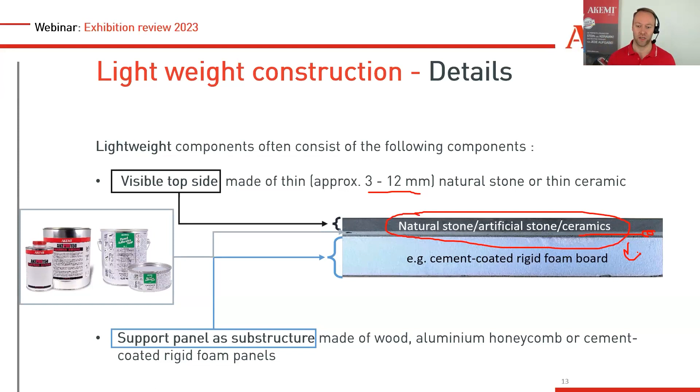Then you have the advantage you save money on the expensive material, which is usually the natural stone. Don't use a 2 or 3 centimeter natural stone. You can save money there when you use a thinner board for the installations. So this is lightweight construction. We have two adhesives for that. As I said, we have our AKEPUR 150, our elastic polyurethane glue, and we have our AKEPUR 7030.

These lightweight constructions usually are built in standard size formats. These boards are usually very straight, flat, 1 meter by 2 meters, etc. So you can cut them and glue them, not to your substrate, to your ceramic or natural stone. But when you want to create a lightweight element which is not flat and straight and square, where there are some inclines, some hidden spots where you cannot put a board, where you have a more complex construction.

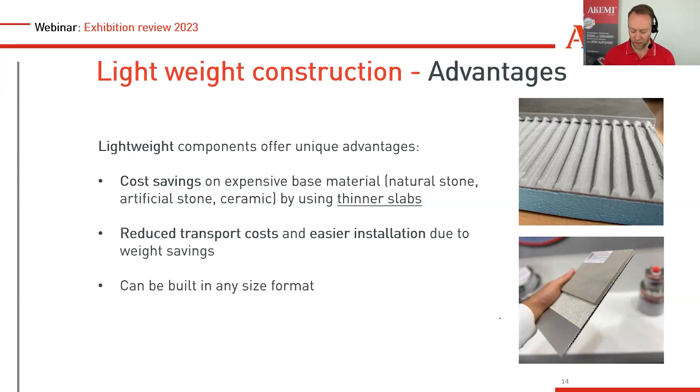So, for example, a shower tray, a customized shower tray with different inclines. Maybe you don't see it here. You have the incline to the drain from here and here. I will show you the back side of this object already. Here maybe you can see it better. So here you have the incline. In this case, it's a ceramic.

It's bonded together with our Everclear, but you have the incline. Here you have the drain, so the water can go out. So how to install that? That is quite difficult. Here you cannot use a standardized foam board or aluminum honeycomb or plywood to glue to it because you always have the incline.

To reinforce it. Of course, you can put it directly in mortar, but then you have to level all the heights with mortar. And you have to be sure that there's no hollow spot which you miss, because it's a 6 mm ceramic. When you step on it and there's a hollow spot, it can break.

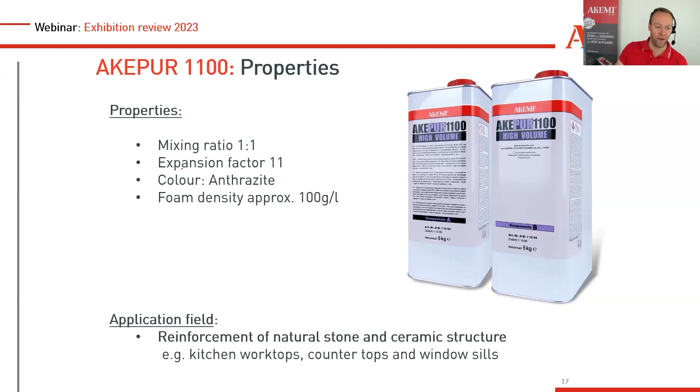So what can we do when your customer asks for such objects? We have a product now called AKEPUR 1100. This is a two-component polyurethane product. And why is it called 1100? Because it has an expansion factor of 11. What does that mean? That means that you have 1 liter of product which will foam up. It will create a foam which will later be 11 liters.

So out of a small amount of liquid, you can get a big amount of foam, which glues and sticks to your stone, to your ceramic, etc., and goes in all the hidden spots and all the inclines and reinforces that. So what is the application field? As I said, shower trays like that, but also kitchen worktops, countertops, window sills. When you want to do some lightweight construction with a massive look, but you have some difficulties to do that with boards.

These are the properties of the product. You mix it 30 seconds. It's quite a fast product. The foaming process starts after 2 minutes. So you pour it in, it starts to foam, the end of foaming is about 7 to 10 minutes, and after 25 minutes, it's hard. And you can cut the excess, for example.

And then you can create objects like that. Ceramic and foam, which is bonded together, very lightweight, very solid. You don't need any extra glue. It's one solid piece of lightweight stone or ceramic.

Are there any questions already, Otello, or do we move to our demonstration? Hello, everyone. Yes, there is a question, but I think we can move to the table and then you can answer them. Okay, let's move.

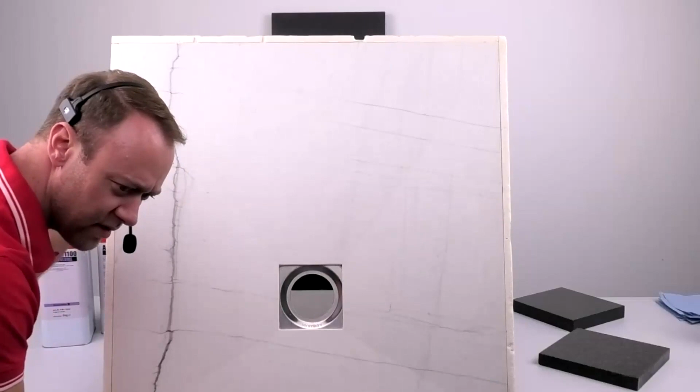Otello, is it visible? Move it a bit more to the camera. More to the camera. Stop. Yes, now it's visible.

Okay, perfect. So you can see here, here, and here the incline. This is a custom-made shower tray. The customer wants a shower like that. He needs an incline. The ceramic should be installed like that. It is very difficult to install that in a mortar bed to get the incline right, to get no hollowness. So what can you do? As I explained, you can use our AKEPUR 1100 foam.

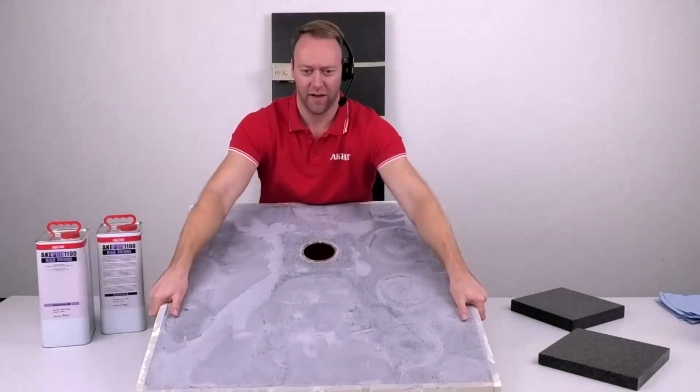You pour it on the backside. It will foam up and create one very lightweight construction board. You can see here, this is the foam, a flat surface now. This is now easy to install, but you have the incline, you have a solid construction. When I knock on it, it's really rigid, it is strong, you can walk on it, and it has a very high compressive strength. It's very strong, rigid, no hollowness, no holes where you step on it. This is this application.

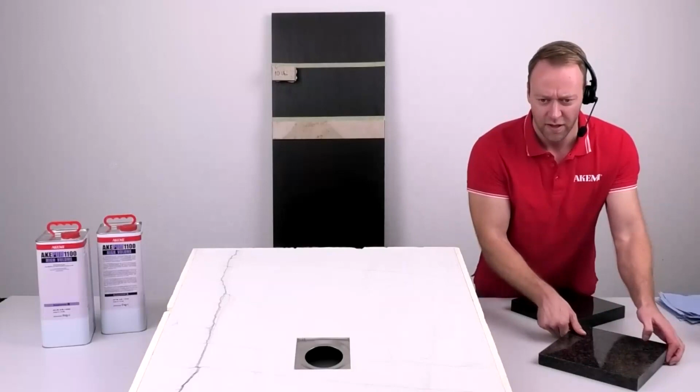On the other hand, I talked about window sills, for example. You have a typical window sill. You see here, 3 centimeters. Very strong, very heavy. I have to lift it with two hands. And on the other hand, you have the same size, but I can lift it with 2 fingers. It looks like a massive block.

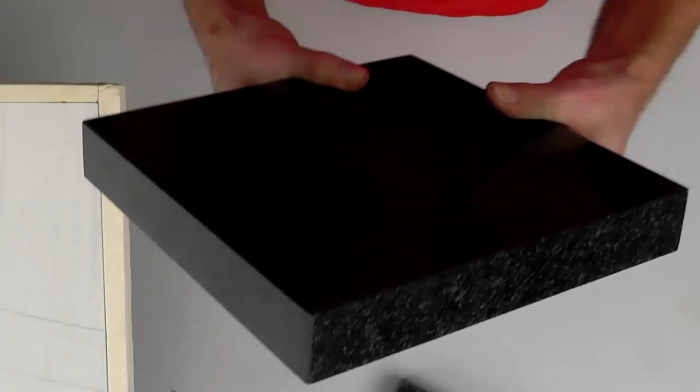You can see it here. It looks like a massive block. It is very strong. It is rigid. There is no hollowness, but when you turn it around, you can see there is foam, which glued to both parts of the stone and formed a very strong, rigid object, which you can put some force on, but it is very light. So this is one application.

Two different filling methods. In this case, you have this frame. I think you can see it. Then you turn it around and you fill it from the backside, so the foam will rise, and then you flatten it. In this case, you build the object like that, and then you fill it from the top, and the foam will rise up like that. Did that answer the questions? If not, I can still show the video.

Yes, there's one more question. One viewer is asking, do I have to use the foam all at once, or can I work in steps, for example, for bigger pieces?

No, definitely. That's a good question. You can work in steps. Actually, in objects like that, it's recommended when you have something like that, you can do it in one piece. It's a small object, yeah.

But when you have like a double layer ceramic or natural stone, and it's like 1 meter by 1 meter or 2 meter by 1 meter, and you fill it up from the top, then it's recommended to work in layers of about 30 centimeters high. So when you have 1 meter, you do it in 3 layers. You pour in 1, 2 liters, it foams up to 20 liters, and then you go step by step. That's in objects like that.

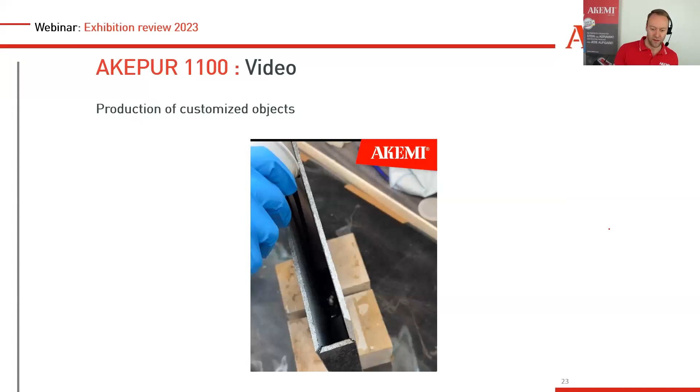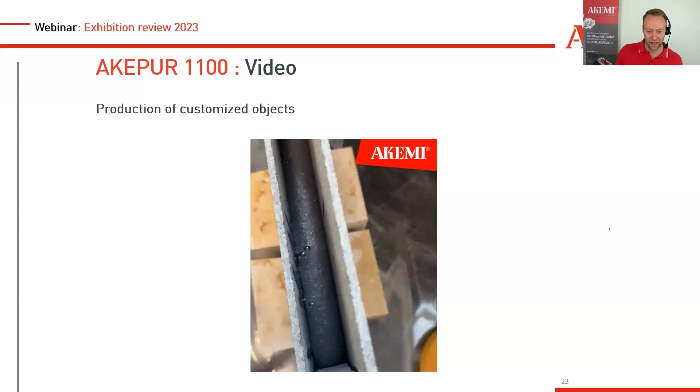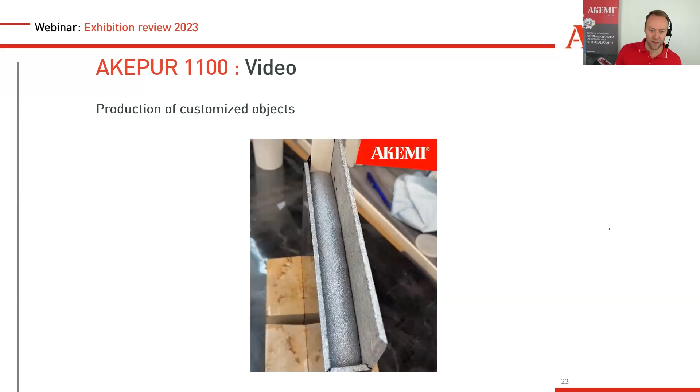No more questions for now? Good. So now I show you how we did this piece, so you get maybe a better understanding. You can see here, we glued it together before, and then we started filling the liquid. It was only a few milliliters, 100, 150 milliliters, and then it foamed up and filled all the gaps here. And it sticks to the stone or ceramic. So it's a proper bonding, and you can do all these lightweight constructions or more difficult or interesting objects.

Understood, or are there more questions, Otello? No more questions for now. Maybe later. We will see.

Okay, one thing I will show you again here for the shower trays. One customer created one of these tables for himself. As you can see, for the bonding of the ceramic, he can use these levels to create the incline, bond it together, and then it's easy for him to turn it around and fill it up with the AKEPUR 1100. That's how he did it in this case, and all the other objects, countertops, are quite easy. You turn them around, you have the frame already with your ceramic mitre bonded, and then you fill it up.

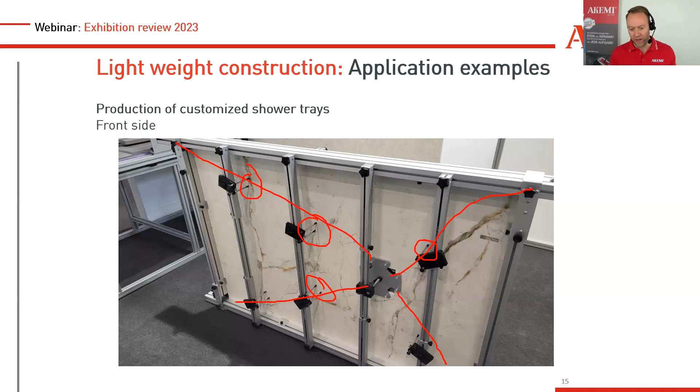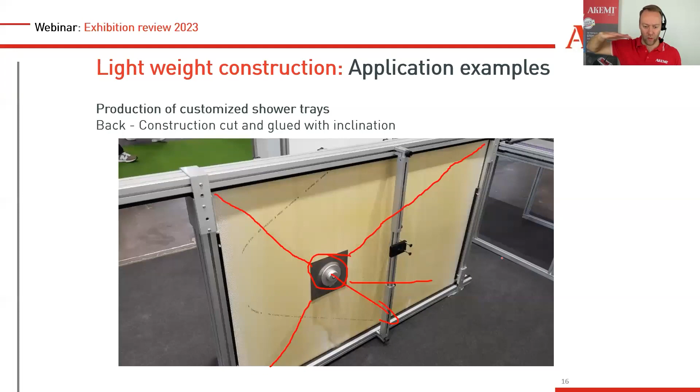When it's cured, you can cut it with a blade or with a saw, a Japan saw or something like this. And when you have a CNC cutting and grinding station, you can also grind and level the backside. With a shower tray like this, maybe the foam is not completely even, you have some highs and downs, so you can grind it with the CNC to a flat level. Good. This was AKEPUR 1100, a rigid, lightweight construction.

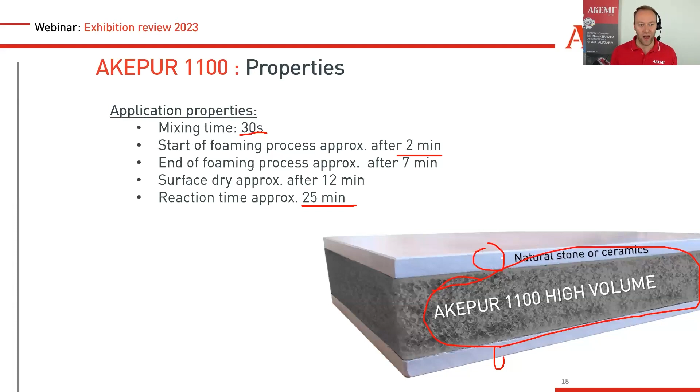Now we come to another big new product range. This is the Akenova series we launched this year. It was available for sale a few months before the exhibition, but the big launch was during the exhibition, and it started very well actually. The customers liked it.

What is Akenova? Akenova is a polyhybrid adhesive. That means it stays a little bit elastic, but you can glue nearly every material like stone, ceramic, glass, wood, everything together or on boards or walls. And it has a very high tack, so you directly have a strong bonding force where you don't need any clamps for holding the pieces in place. Of course, the curing will take a little bit longer. Like all hybrid polymers, they need a little air humidity to cure.

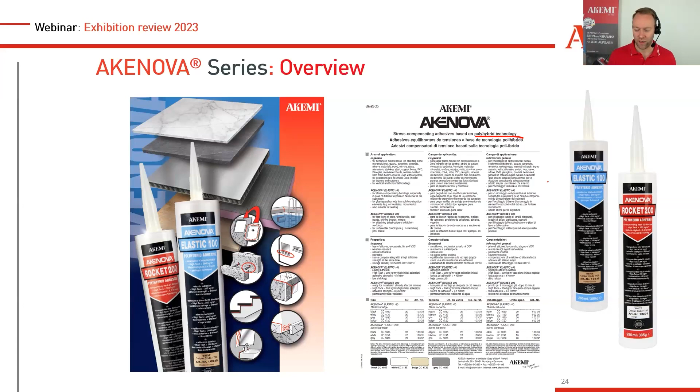So the curing time, when you have a bead like this, a string, it needs about 3 millimeters in 24 hours to cure. But the tack, which I'll show you in a bit, is there instantly. It's an elastic polyhybrid adhesive. We have two versions, the elastic and the rocket. I will show you the differences.

As I said, natural stone, wood, metal, glass, ceramics, everything will be bonded. It has high initial adhesion - this is the high tack. We say about 200 kilos per square meter is the initial tack, where it doesn't move anymore. Then the curing will be later on, and the bonding strength later is also very high for a product like this. It's 4 Newton per square millimeter.

What is the big advantage also of this product is it has absolutely no bleeding on natural stone. There are a lot of hybrid products on the market, but they came from different fields. This product is originally designed around natural stone, so it's designed for natural stone to bond with all the other materials. That means these hybrid glues, most of them you cannot use on natural stone - they create some patches, some bleeding. Some have footnotes saying you can use on stone, footnote: you need a barrier primer first, which blocks the glue from bleeding into the stone. This is all not the case with the Akenova. This is perfectly 100% suitable for natural stone.

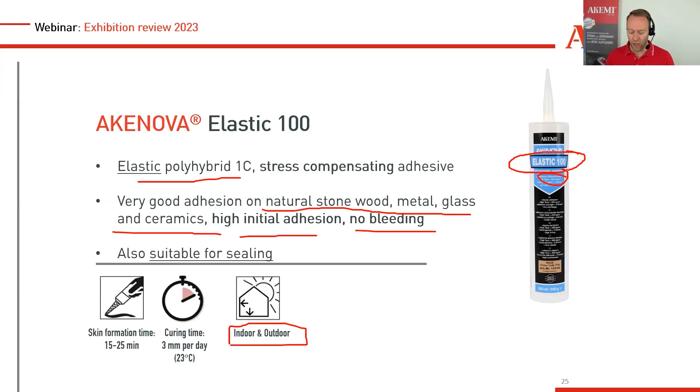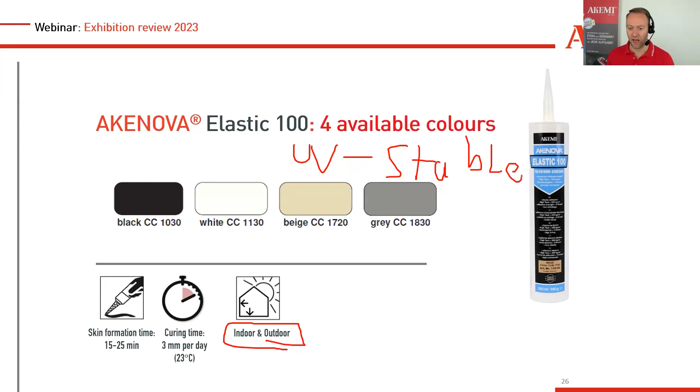What is the application, or what are the colors? The colors are black, white, beige, and gray right now. And if someone has the question, as it is used outdoor as well, of course these colors are UV stable, so they stay like they are.

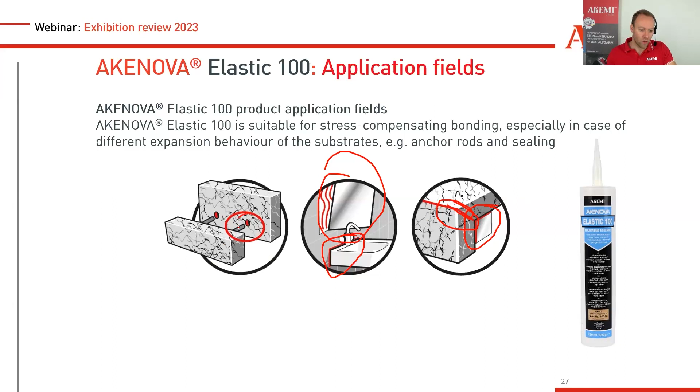So you can also bond and seal outside and the glue stays like it is. What is the application? For example, gluing mirrors to the wall - you can see here we can use it as a sealant. You can directly glue stone to stone, exactly on miter bonding. Sometimes it's quite interesting to bond directly, or you can use it to bond reinforcement to the backside of some natural stone, like aluminium or stainless steel frames to the stone or ceramic. Also for some anchoring, it's possible to use.

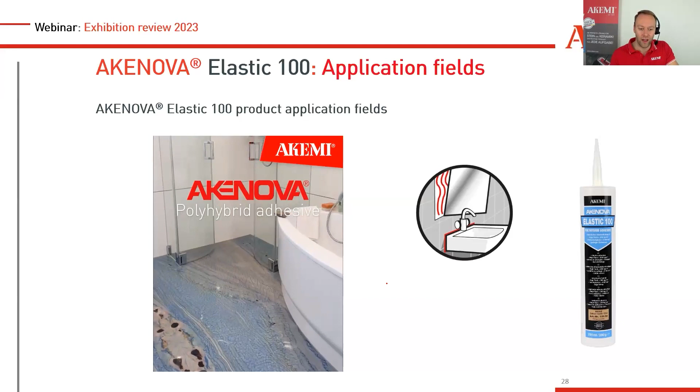This is the elastic 100. Basically you can use it everywhere where you don't want to drill. We have now here some examples from the bathroom - you have a ceramic, you don't want to drill a hole here, you just glue it, glue the handle there. You can glue the picture there, or the mirror there.

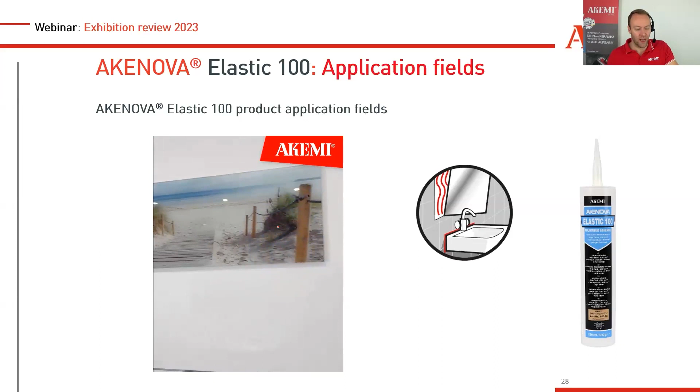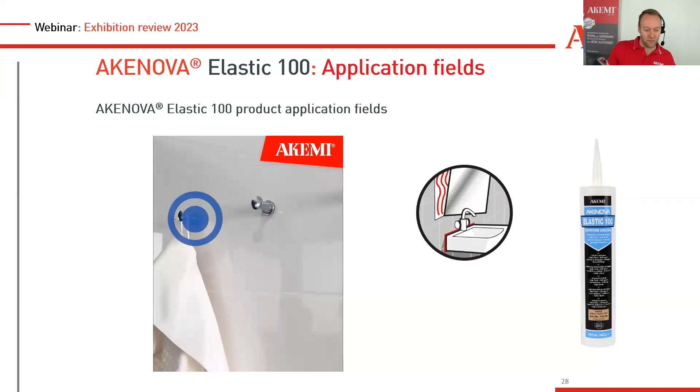Here, what is it, the holder of the shower. Then some - what's this word - towel holders. You can see here, usually there would be a screw inside, not needed. You use the Akenova, it will stick, it will bond, and it has a very high initial tack. This is the 200 kilo per square meter. And when it's cured, then it will be very, very strong and stick all these materials.

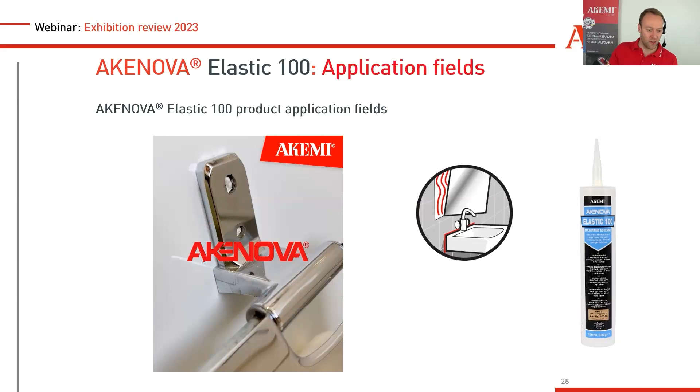No need of roughening the surface. You can use it here as you see on the ceramic - it's a polished surface, just use it directly on this surface.

Are there any questions? Yes, Johannes, two questions. One question: do I have to roughen the surface before I glue? Just answered, not needed. And the other question is, how can I remove this glue - is it with heat or mechanical? No, you have to cut it later on if you want to remove it.

Of course, we see it - it's possible to soften the bonding and then you can remove it. But actually it's meant to be a permanent glue. It is adhesive, not only a sealant which you have to renew after some while. It's an adhesive, meant to stick there permanently.

But if it is possible, you can cut it, for example, with a - what is it - a diamond wire, a small diamond wire. You can go behind and then open it up. But still there will be some leftovers on the stone or substrate, because it doesn't just stick like these Tesa power strips or something. This is really a chemical bonding to the substrate.

Yeah, these are the cartridges. We have 3 colors for rocket, 4 colors for elastic. I'll come to rocket later.

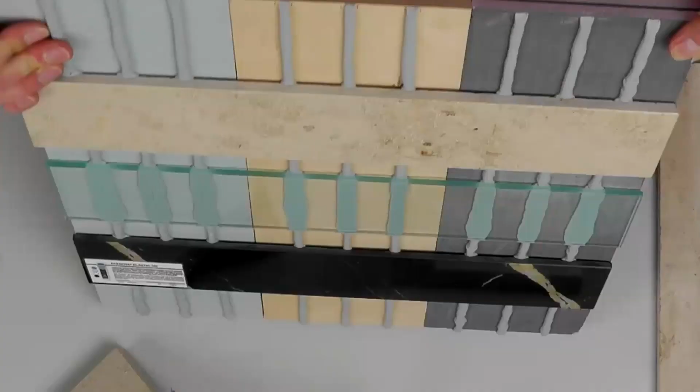What are the differences exactly? Here you can see we glued a lot of different substrates together. We have aluminum honeycomb, wood, cement foam boards, natural stone, glass, ceramics, and other materials bonded together, and it all works with the Akenova.

As it is a polyhybrid, it needs air humidity to cure. So always leave a little bit of a space so the air can flow inside and start the curing process.

So what is the advantage? As we said, this high initial tack. I bonded here in the morning webinar, we bonded 2 pieces here already. It's 10 o'clock now, and I'll come to that later.

Now we will do the same. We will bond some stones to the wall, so you can see this initial tack. First, I think we start with the, was ist denn das, Sockelleiste? This is usually when you have the stone on the bottom of the floor on the walls. I'm not sure what is the English word there.

I just want to show you the tack. I go directly here, stick it to the wall, press it a little bit, and that's it. Yeah, it's not moving anymore.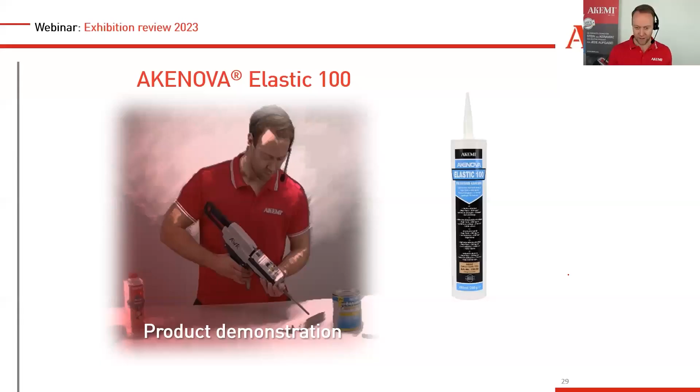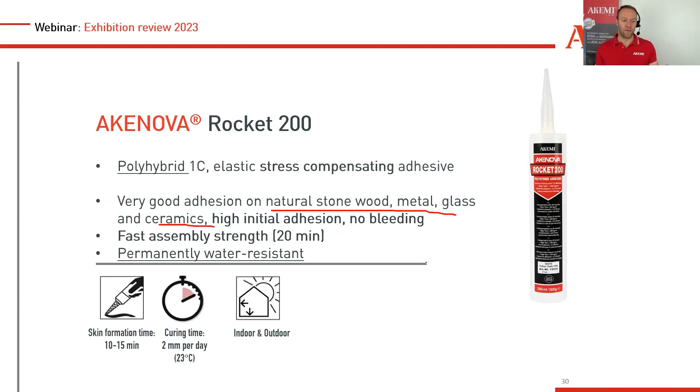That was elastic. Now we come to the rocket. What's the difference to elastic? Rocket has the same bonds on the same materials. It's all the same, just a little bit stiffer and thicker as well. So it has more of this high initial adhesion. It's better for really assembling parts.

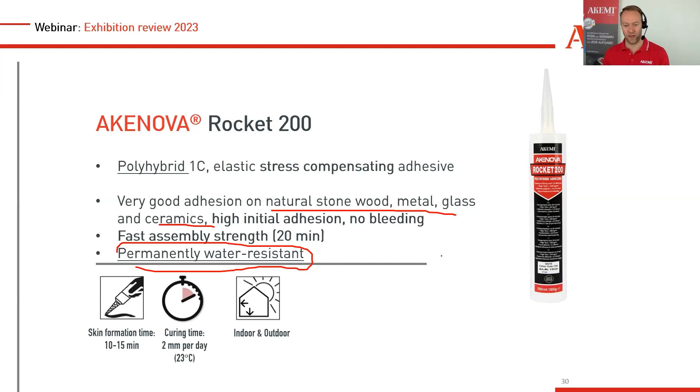And what is the advantage? It's permanently water resistant. So if you have installations underwater or exposed to a lot of water, you can use the rocket. Of course, we also have 3 different colors: black, white, and gray - this is some stainless steel gray somehow. I'll explain why we have this color later. You can see here water installation, even underwater. When you have to fix a tile or something, you can use the rocket. All the mitre installations where there's a lot of water exposed, you can use the rocket.

And then there's one big application field: sinks, the sinks for the countertop, which you glue underneath the countertop. This is a major application of this Akenova Rocket 200. And why the rocket is so good there, I will show you in a video.

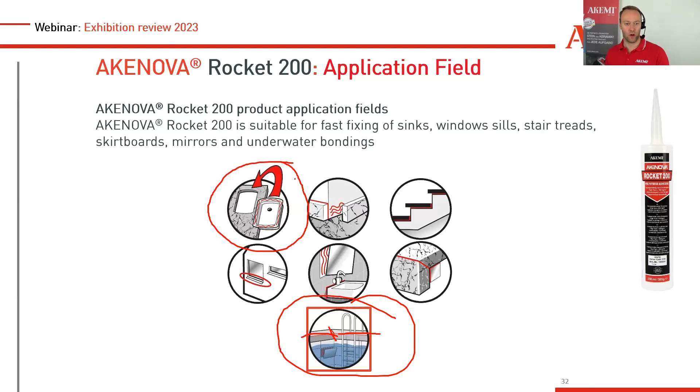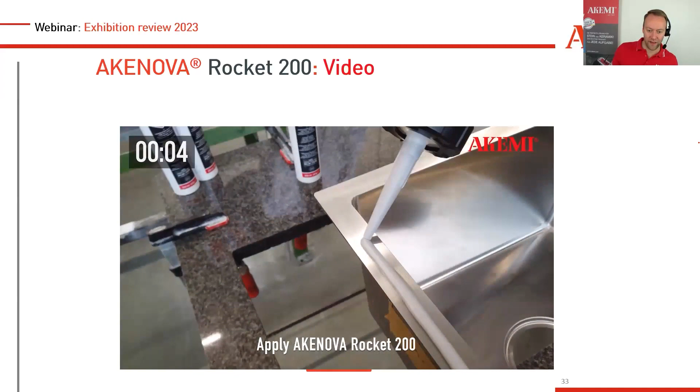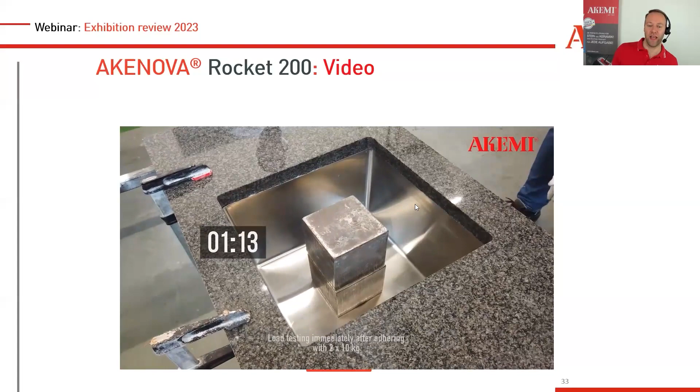As you can see here, we have this thing which we want to glue under the countertop. You apply it, and that's the reason we have this gray color - it should be more similar to the stainless steel. You can see the timer running live. Now we press it to the stone, and now there was like 30, 25 seconds in the countdown, and now that's the advantage - this is the initial tack, instant tack. Now we can directly put some force on it. Here we put some 10 kg steel blocks on it. So it's 1 minute into the application, and already we force 30 kg on it, and it still sticks.

So this is a very nice help for installation guys. When they do these things on countertops, they don't need any clamps or installation tapes where they have to go remove them the next day. They only need to go once, stick everything together. Of course, they put a note: don't put too much force on it, wait 24 hours - but it holds the thing directly. No need for clamps or waiting for curing and then removing those clamps.

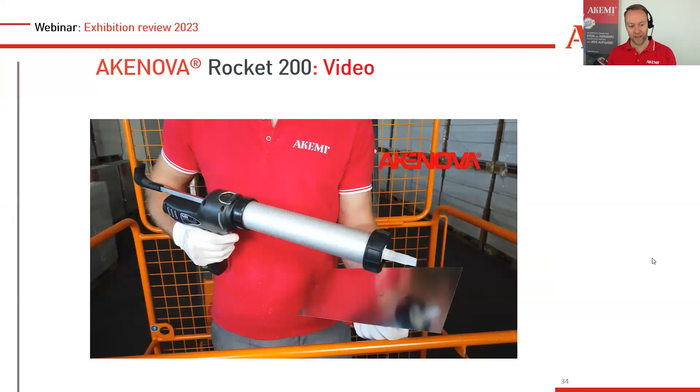Here's a little fun video just to show you this initial tack. We put it on some flattening tools for the mortar. By the way, this is what Johannes does every morning.

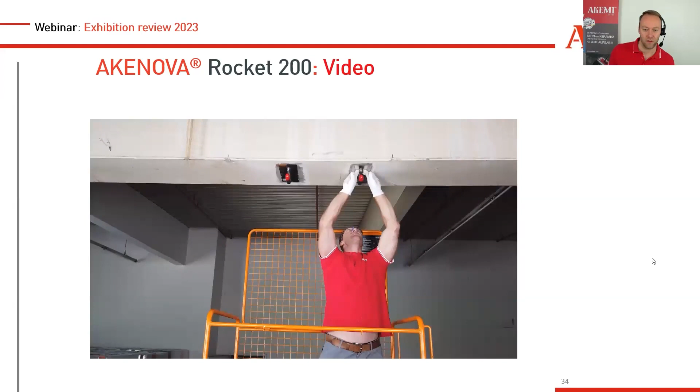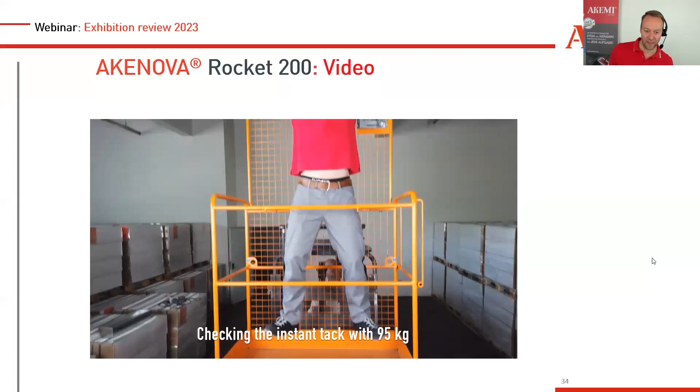You can see we stick it together in these beams, and I force my 95 kg on it, and it sticks. 1, 2, let's see what this guy can do. 3, 4, oh he's breathing heavily. 5, that's it, not more. So 5 pull-ups, that's quite something.

It's okay. So that's one to show you how strong this initial tack is. That means it's not cured yet. It's not for very high force, so don't pull any high force on it, but it shows you how strong it is for installation works.

When you put a mirror, when you put a thin natural stone board or a ceramic board to glue it to the wall, to the front tray of a cupboard or something. That's where the application field is, and where you can put these things to the countertop. So this is the main application.

And now I go back to the table and just show you a little bit the difference again. That's only here because the glue, the initial tack is the same. We can do that, and you can see it's still not moving. That's the fresh one. I think we can mark it for this evening webinar. Right here, 3 o'clock. And so it's not moving. And this is the difference.

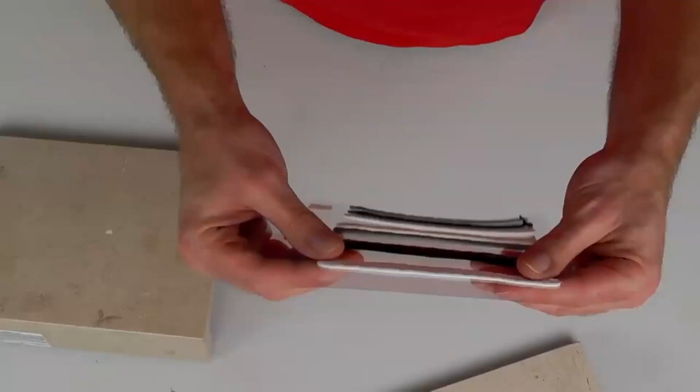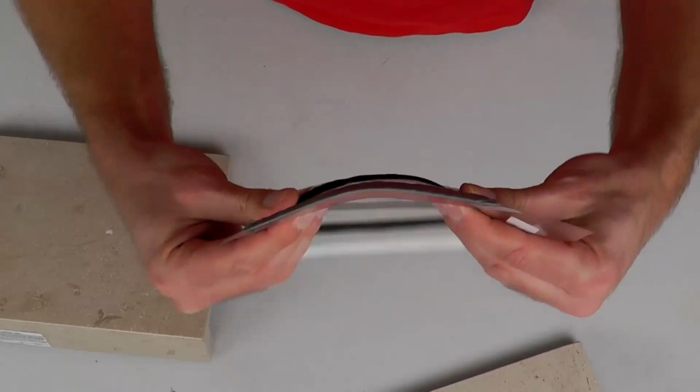The elastic and the rocket both have this 200 kg instant tack per square meter, but why are there two? There's the elastic, and you can see this is quite flexible. This is the elastic. And when I turn it around and go to the rocket, I can also bend it, but it's much stiffer. So that's what I need when I have these things to glue to the countertops or other bigger objects together. Then the rocket is the product of choice. Or when you have underwater installations, the rocket is the product of choice.

Later on when it's cured, it has a very high bonding strength, 6.5 Newton per square millimeter. I've never seen a polyhybrid product with this hybrid technology with such a strength. That's the differences. Elastic, rocket. This was our main topic in the Verona exhibition.

Are there questions, Otello? Yes, one question. Will there be more colors in future? Possible. Yeah, possible. This depends on the market, what they ask, what they need. Right now, we sell these 7 colors very well, but probably there will be some more colors in future.

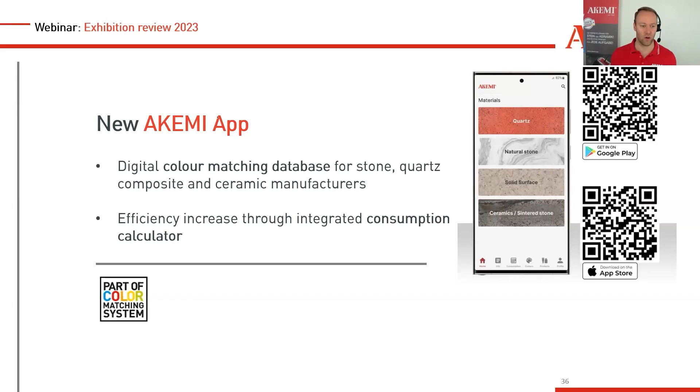Good. Then let's move from the bonding and practical world to the digital world. We also have to show you something new. We have a new Akemi app. We used to have an app, the color chart app. We relaunched it. We made a new one. The only issue was it did not update automatically, so you have to delete the old one and download the new one. So if you still have the old one, please delete it. Go to your Google Play Store or App Store and search for Akemi app. This will be the new one.

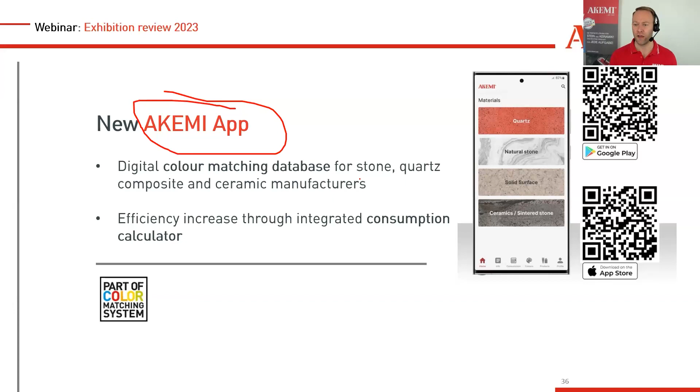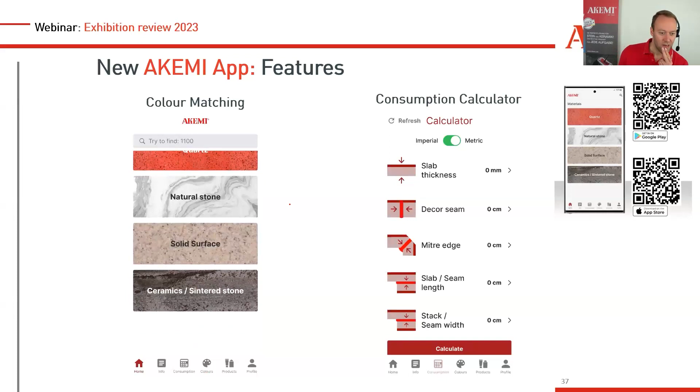What is the difference? The old application was only in one language, English, and this application has 5 languages. I think German, English, French, Spanish, Italian, I believe. So you can choose the language of choice. We made it faster. We made it a little bit smarter. You can see here, this is the screen video. You come directly to the choice of the materials, quartz, ceramic, natural stone, etc. So you choose the manufacturer of your material, and then we will match the right color bond, the right spectrum paste, and the right composite silicone for your application.

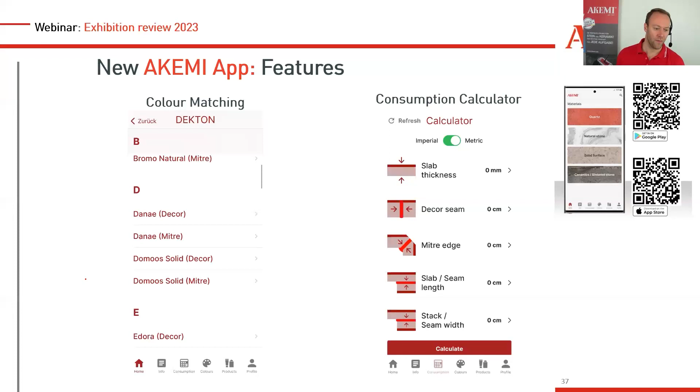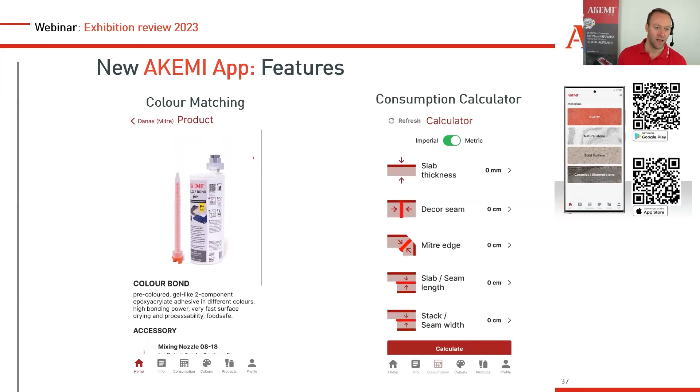In this case, we choose the Dekton, and then we use some material, the Danae, and first choice is our beige, and you click on it, you get the color bond, you get all the accessories available, and then you go out, you get the second color choice, you get directly the article number, spectrum paste, Composil, and color bond. And what we also did new was the consumption calculator.

You can see here on the right side, you can choose between imperial and metric, and then you dial in the slab thickness which you want to bond. You put in if it's a decor seam or a mitre seam, you put in the length. So that's quite a long countertop, 10 meters and 10 meters mitre bonding. So 20 meters kitchen bonding, it's a good kitchen, I would say. And you just need 198 milliliters of color bond. So you can see how efficient the product is.

But when you have a production, when you have a lot of kitchen countertops to do, you can always directly calculate here the amount of product you need. So download it, use it, like it, learn some new languages when you want to change it.

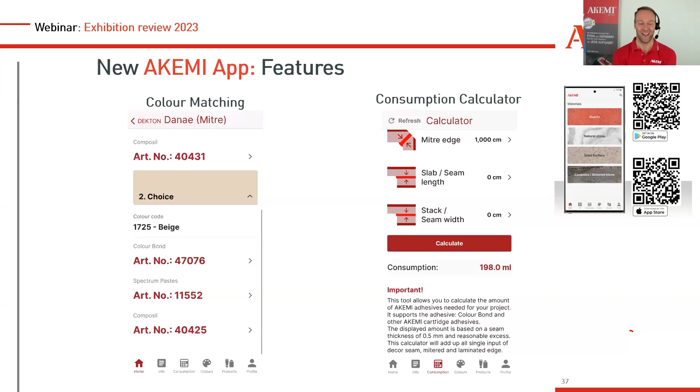The language, it's very easy. And yeah, that's the new digital feature. And then we have, again, some chemical products, not new products, but in a new format. We have a stone clean and care set.

So what we have put inside: our Crystal Clean spray, our pH neutral daily cleaner, which is perfect for all the polished surfaces in the kitchen area, which is the countertop, the cooking field, the window or mirror or the front of some cupboards. Everything which is polished, you can clean with the Crystal Clean. It evaporates very fast and it does not leave any streaks. So it's very fast and very efficient. It is, of course, food safe tested, which is important for your countertop. And yeah, that's for daily cleaning.

And if you want to, let's say, do something good for your natural stone countertop, polished one, we have also added our Triple Effect spray. Triple, because it has three effects. It cleans, it protects, and it cares. So it cleans some dirt, and then it supports the impregnation, the penetrating sealer which you have put on the countertop. It has some protective ingredient inside, which refreshes the impregnation and prolongs the protective effect of the impregnation.

Plus, it has some care ingredients, which give you a little bit better gloss and shine. So that's the reason we have also a polishing cloth in it, a microfiber cloth. You apply it, you wipe it, and then you buff it a little bit to get the high gloss. And this is a product you don't use every day. This is maybe once a month. And the Crystal Clean is for everyday use. So it's ideal to give to your customers when they bought a kitchen countertop. You just give the set, and they have the right products for daily clean and care.